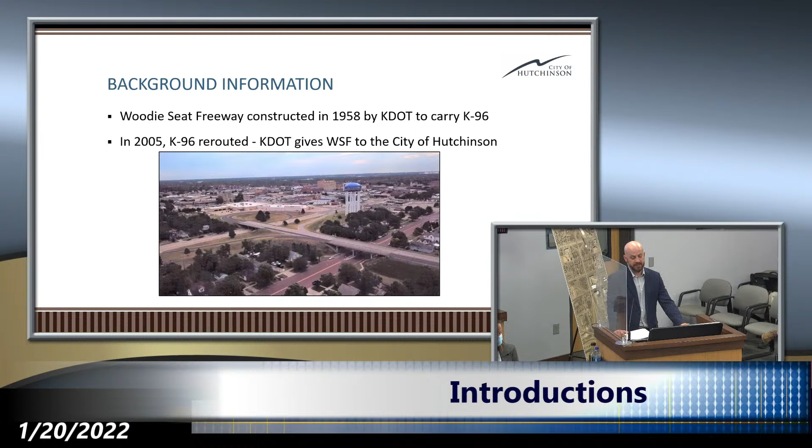So TEAP stands for the Traffic Engineering Assistance Program. It is federally funded and administered by KDOT. The intent is to perform traffic analysis and services for local agencies to analyze transportation challenges. These analyses are performed by traffic engineering consultants selected by KDOT. They are typically safety-related requests; failing infrastructure is not a reason for a TEAP study, nor is replacement in kind.

In 2017, the TEAP study was granted to the city and initiated. The consultants discovered that the intersection does meet the criteria of a dangerous intersection, but there was no financially responsible way of increasing safety with the current configuration. In 2018, the city requested a second TEAP study to help identify ways to mitigate the dangerous intersection. KDOT suggested studying an at-grade roundabout.

So in the photos here, the left one is a picture that shows 39 accidents that happened between 2013 and 2017 when the study initially began. And the right slide is a picture of a semi descending the off-ramp with a bicyclist at the bottom. With the way the descending drivers have to look over their shoulder, it isn't possible for them to see things in front of them. The grade is steep, which means you approach the intersection fast. The semi driver in this photo actually did not see the bicyclist and went through the yield sign. Luckily, you can see the bicyclist stopped at the last moment and let the semi go in front of it.

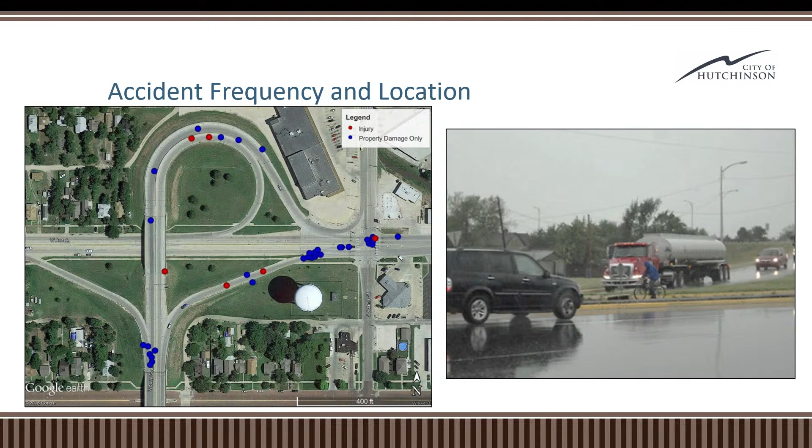So, the 2018 TEAP study evaluated several different options, comparing them to the existing interchange. These are the options that we'll be going over today. Options 1 through 4 were used comparing the current, then 2018, and future 2040 traffic volumes. Options 1 through 3 all involved removing the Avenue A and Avenue B bridges. Option 4 is the only one that keeps the bridges in their configuration, although all the upgrades are going to be required. The 5th option was not studied in the TEAP, and it is to end the Woodie Seat Freeway at Avenue F. This option was not studied due to its broad scope, and it affects more than one intersection.

So with that, we're going to go over the options. Here's Jessica. So we have 5 options to go over tonight. If you have any questions as I'm going through each option, feel free to stop me and ask a clarification, but we'll try and do most of the questions at the end when we get into our discussion.

So for the first 3 options that I'm going to go over, they're very similar, and they all require the removal of Avenues A and B bridges in order to end the Woodie Seat Freeway at the same elevation that Avenue A currently is right now. Shown here is the profile of the existing grade slope. It's kind of hard to see on the screen, but you can see Avenue B, Avenue A, and Avenue C, and the bridges that go over them. And then the proposed grade for options 1 through 3, which is a 4% slope right after Avenue C, coming down to meet where Avenue A is.

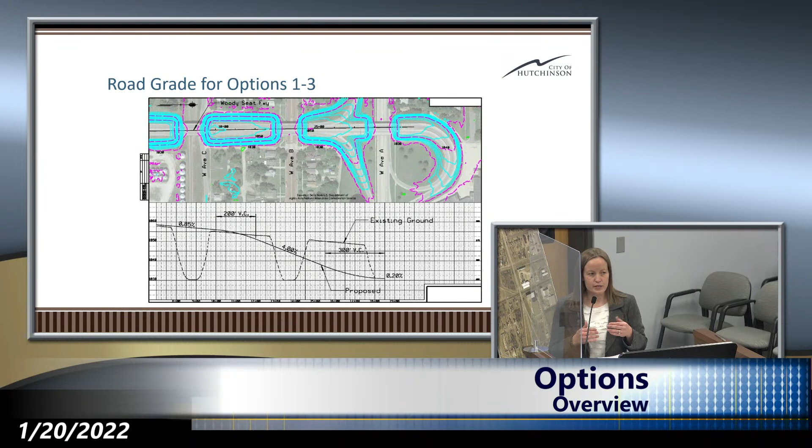Just for some scale, currently the off-ramp from Woodie Seat to Avenue A is 5.5%, and the on-ramp going southbound from Avenue A is 6%. And then the on and off loops that you drive on the north side of Avenue A, those are at about 3.8%. So the new grade would be very similar to what the grade of those loops are.

So we'll start with option 1. This is a single lane approach from Woodie Seat to Avenue A, ending in a T intersection. The northbound Woodie Seat traffic would be stop controlled at first with a stop sign, and then the stop sign would eventually be converted to a stop light if and when warrants are met. New sidewalks would carry pedestrians from Avenue B either north to Avenue A or south to Avenue C to maintain pedestrian access. Included with this option are pavement improvements from Avenue F to C and bridge repairs to the Avenue C bridge. And actually, these are included in all of options 1 through 3. If an option 1 through 3 is chosen, we'll be doing the road improvements from F to C. Okay.

So we'll go through some pros and cons of this option. I do want to comment at the beginning, and I won't say it for all 5 options, but it's important to look qualitatively rather than quantitatively at some of these. You may see one of the options has 1 con, and you think, oh, well, it only has 1 con, but it's a big one. So just try and keep that in mind as we go through this.

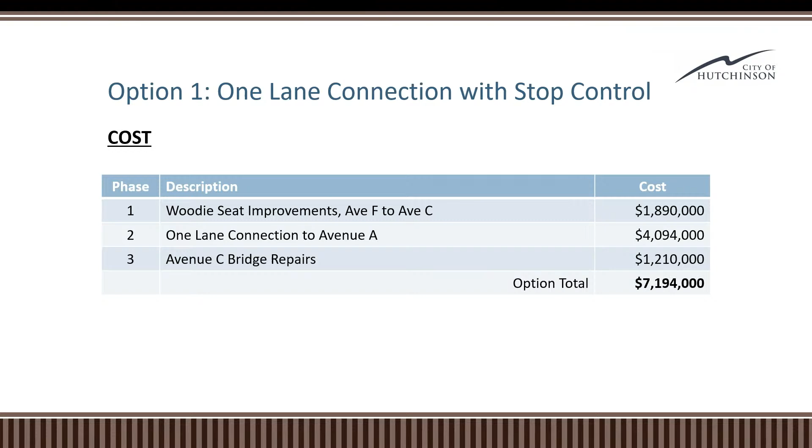Moving on to the next option, it looks a lot like option 1, except this is a 2-lane connection with stop control — two lanes coming off of Woodie Seat, two lanes going onto Woodie Seat. Again, this option removes the Avenue A and B bridges, and at first it would be stop controlled until signal warrants are met, and then a signal would be installed.

The pros and cons of this option are that, again, two bridges would be removed, so we would not have those on our maintenance roll. There would be fewer accidents than existing — 4.44 fewer, so a little bit, not quite the benefit that option 1 has as far as fewer accidents. That's reflected in the 20-year societal savings, about $1.28 million. But we would have the 4 acres of land available for park or green space.

The cons of this option are that the northbound left turn lane will experience a very long delay and long queue length. For future traffic volumes, this delay is estimated at about 11 minutes.

We're kind of joking in the office that there wouldn't be an 11-minute delay, because no one would be using Woodie Seat at that point. Everyone would be going somewhere else. You'd have a 10-minute or 5-minute delay somewhere else.

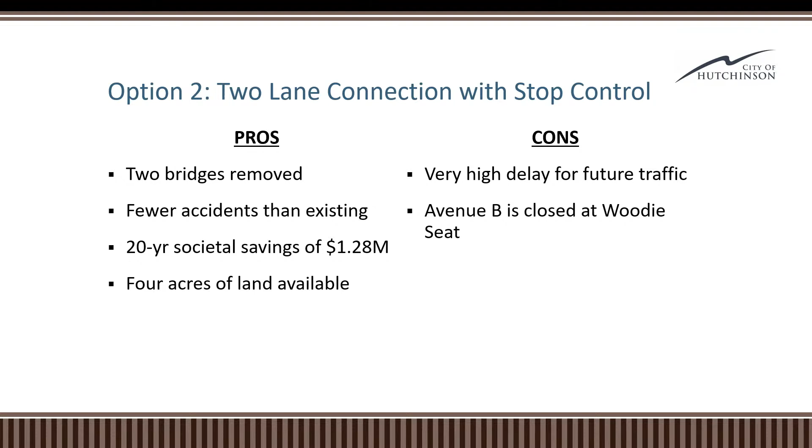And again, as with option 1, Avenue B would be closed. So we'll go into the cost of this.

Phase 1 is $1.9 million in roadway improvements from Avenue F to Avenue C. We have that 2-lane connection to Avenue A for approximately $4.2 million. And then the Avenue C bridge repairs would be $1.21 million.

A little bit later in the conversation, we will talk about how we can phase some of this cost. This cost isn't all due tomorrow; we can spread it out a little bit. And of course, Angela's here to answer all those questions for you as well. I promised her I'd throw her under the bus at least once.

Hey Jessica, quick question about the Avenue C bridge — if we repair it, how many more years are we going to get out of that? So what we're looking at is like a 20-year life, 20 more years before we need to do anything else with it.

It doesn't mean that in 20 years it has to be replaced. It kind of depends on how the structure ages, but typically when we're looking at bridge repairs, it's to get 20 more years. If we were to put a new bridge in, we're looking at a 75 to 80-year structure.

Do we repair it again in 20 years? Typically, yes, it's about every 20 years that you're looking at repairs. It's going to hold up if it's repaired properly down the road — that is the goal of the repairs, to get 20 years.

Jessica, quick question — when you talk about traffic lights, I'm a traffic tech. Where are you putting the traffic lights here on your T intersection? Are you going to put one right across from the T? I believe so, but I don't know that it's fully been designed — it's just conceptual at this point. It's going to be semi-actuated, so you'll only get calls coming off that leg. It hasn't been designed yet, so I couldn't answer that fully.

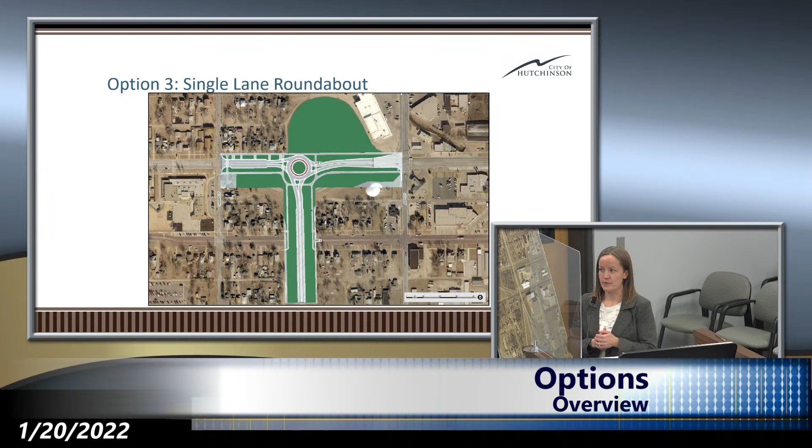We talked to the consultant that studied this, and they said yes, the second roundabout is really needed for future traffic, but we could make one roundabout at the interchange work with current traffic volumes and some signal optimization — the second one may never be needed. So we pared this option down to make it a little more realistic for our financial situation.

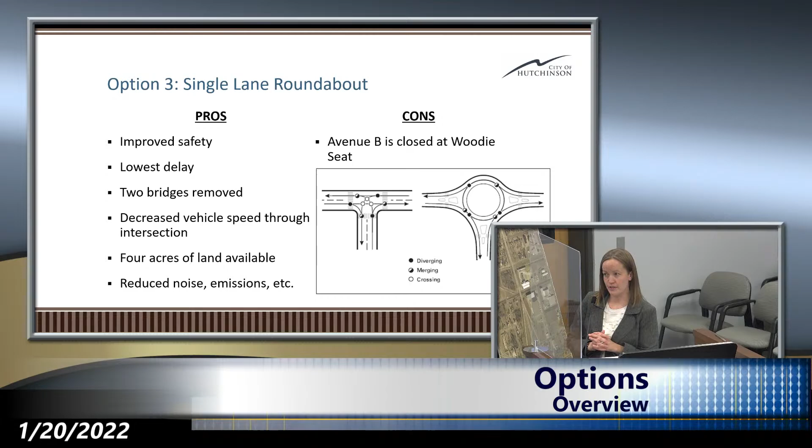Okay, so we'll talk about pros and cons of this — it's going to get a little wordy, so stick with me. Roundabouts are a proven safety measure that reduce the number of crashes, fatal crashes specifically, at intersections. Compared to a stop-controlled T intersection like options 1 and 2, a single-lane roundabout has 6 conflict points, where a stop-controlled T has 9. You can see in the picture here the conflicts as you're turning left, turning right, or going straight.

One important thing to note: you don't see crossing conflict points in a roundabout, and crossing conflicts are notorious for more serious crashes. That doesn't mean you don't have crashes with a roundabout — it's that the types of crashes are less severe. That's why you see higher societal cost savings here compared to an intersection with different types of crashes, since diverging and merging conflicts are less severe.

And then, like I mentioned before, with this particular option, we have the option for a second roundabout in the future to improve or maintain traffic flow through the corridor.

I also want to mention that roundabouts are safer for pedestrians. Pedestrians enter and cross at a shorter distance, and they only cross one direction of traffic at a time. So if you're thinking about a traditional four-way intersection, pedestrians are crossing two directions of traffic, whereas at a roundabout, they're only crossing one leg of one-way traffic.

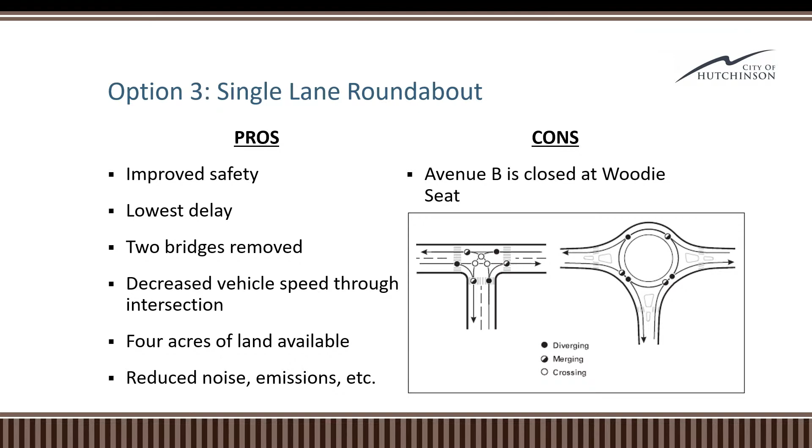So we'll talk about cost on this option. Again, with phase 1, the Woodie Seat improvements from Avenue F to Avenue C is $1.9 million. The roundabout itself comes in at about $4.13 million. And then there are those Avenue C bridge repairs for $1.2 million.

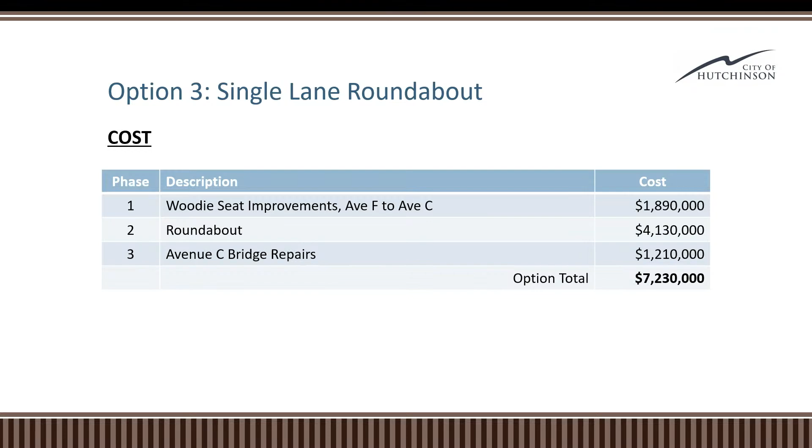Jessica, I may have missed it—did you say what the actual traffic delay would be, time-wise? You know, I don't think I said that. I have it here in the study. Can I get back with you on that? Just curious. Okay, it's lower, but how significant? We can move forward and that can be found.

So the existing condition in current traffic has a delay of 29.5 seconds, and with a single-lane roundabout it would be 6.4 seconds. With existing conditions, future traffic delay is 45.5 seconds, and with a roundabout, the future delay would be 9 seconds.

I do also want to point out, because we applied for that grant with this particular option, a cost-benefit analysis was required. So we did that for this option, and the cost-benefit ratio was 1.87. Typically, anything over 1 is considered a go, so this was a go.

Okay, option 4 is what we're calling the no-build option, what the TEEP study called the no-build option. We're kind of plagiarizing from them a little bit. No-build does not mean do nothing—rather, that infrastructure remains in its current configuration.

I do want to note that Avenues A, B, and C bridges are over 60 years old. Their design life when they were built was 50 years. I mentioned that if we replace bridges now, we look for a 75-year design life—when they were built, that may not have been the case. I have lots to say about the design of these; they were kind of unique structures when installed, and Kdot doesn't design them like this anymore for a reason. So we'd be looking for configuration or structure upgrades with the bridges themselves, but the configuration of the roadway would stay the same.

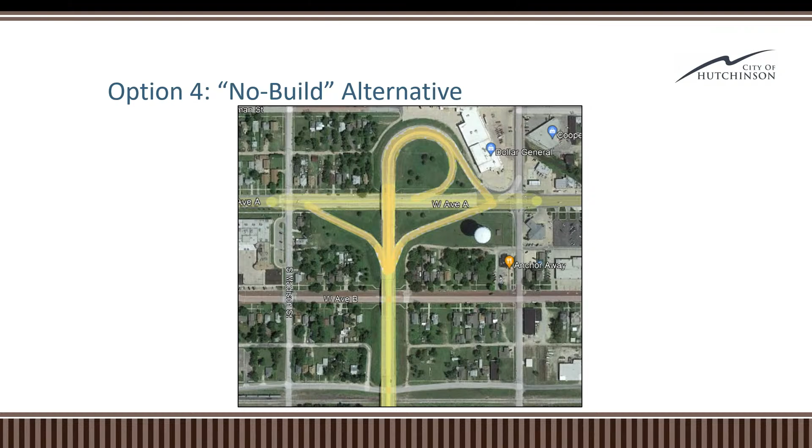So we'll go over some pros and cons of this option. The big pro is that Avenue B remains unchanged, which we know is a neighborhood concern. The cons are that there are no safety improvements and no improvements to pedestrian infrastructure. We also have those two additional bridges, Avenue B and Avenue A, to maintain in perpetuity. And it has a higher overall construction cost—to be clear, a higher construction cost right now and a higher overall maintenance cost in the future.

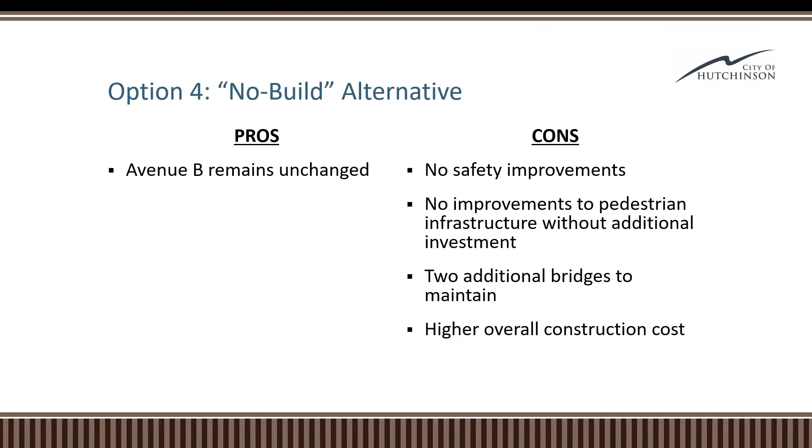So we'll talk about cost. The first phase of this would be to start repairing the pavement on Woodie Seat, from Avenue F all the way to Avenue A, for a price tag of over $3 million.

While that's happening, we would have a consultant working on the design to replace the Avenue B Bridge. The cost estimate for that bridge replacement right now is about $2.86 million. That's why I mentioned the Avenue C Bridge is quite a bit bigger and higher than that. Avenue B Bridge is actually not as large, so we have some savings there, I guess, one way to look at it.

We also have some Avenue A bridge repairs for about $770,000, and then Avenue C bridge again for $1.2 million, for a total of $8,060,000 on this option.

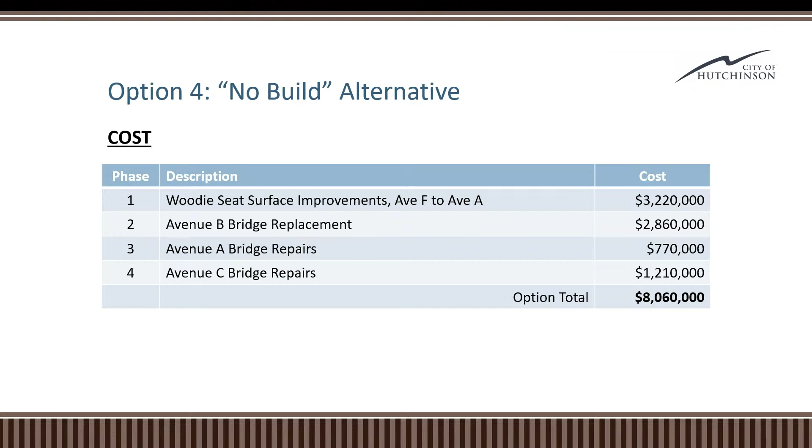Okay, so that concludes the options that were looked at in the TEEP study. While we were preparing for tonight, several versions of this last option were mentioned, so we put it together. I want to clarify, and I'll probably say it again, that this option has not been studied. So the costs we put in are estimates for what we know right now. The cost is probably a little low, considering that as we study it, we might find other things that need to happen, infrastructure upgrades that will increase it.

So this option is the removal of the Woodie Seat Freeway at Avenue F. We would remove all of the bridges. Traffic would end at Avenue F. Improvements to Avenue F, Monroe, and Adams would have to occur to handle the increased traffic that would now be diverted to at-grade streets. And we would likely need an improved connection to Main Street. We think that would happen at Avenue A, but again, that's not included in our cost—we haven't studied to make sure that's actually feasible yet.

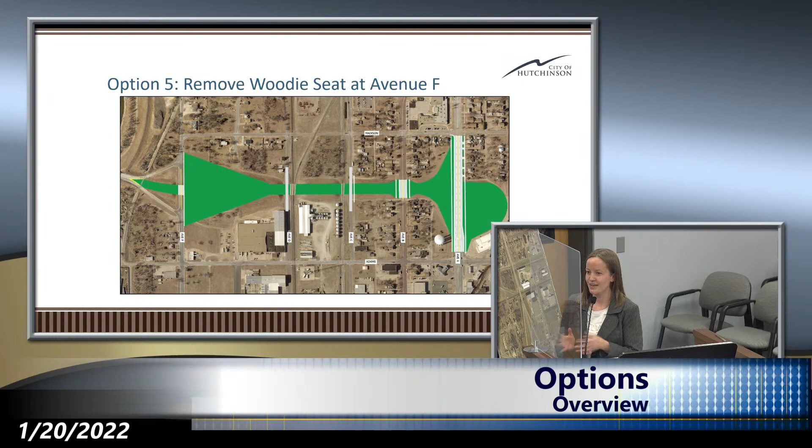So we'll go over some pros and cons of this option. The pros are that we would eliminate all future infrastructure maintenance costs of these bridges immediately. There would still be maintenance, but it would be at-grade infrastructure, roadways, things like that, and across the board that's cheaper than maintaining elevated infrastructure.

A major pro of this is that we don't have a closure of Avenue B. And then we would get improvements to Avenue F, Adams, and Monroe, so those roads would be a little nicer, I guess. And we have the option for a gateway entry to the city a little farther south on Main, increasing traffic to businesses farther south.

One of the cons to this option is that we would have the entry to the city farther south on Main. Why is that a con? Well, farther south—I believe it's Avenue C—south of Avenue C, the intersections on Main Street are just not built for that level of traffic. So we would need to do some improvements there, or we would see some fairly quick degradation of the streets when more people start driving there.

I want to compare what we're looking at right now. On Main Street, south of C, we're looking at about 2,500 vehicles a day, and Woodie Seat has over 10,000 vehicles. It's not to say all 10,000 are going to go to Main Street, but you would definitely see a substantial increase in traffic in that area, which could be good, but for the roads, we would need to make some upgrades.

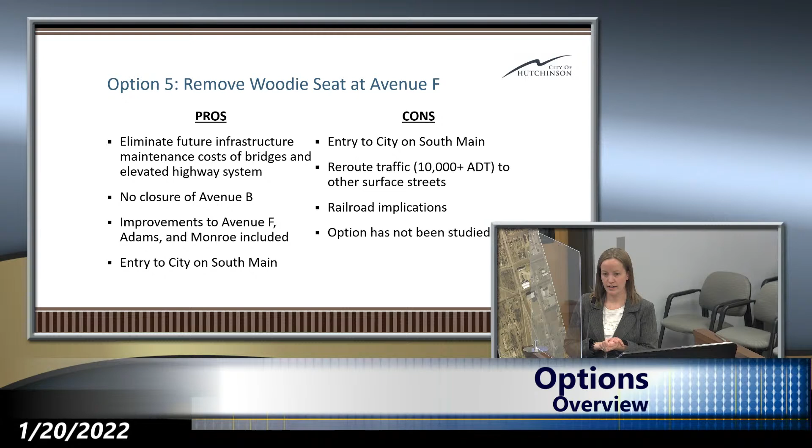And finally, like I said before, this option has not been studied. We did have an engineer briefly review to make sure we could get traffic from Avenue F down to grade, but that's as far as we've gone. So needing to study this option would take additional time, and after that study is completed, it might be that we find the option doesn't work.

Okay, so we'll talk about cost on this. Again, these are preliminary, just based on improvements we know we need. Improvements to Monroe would be about $410,000. Improvements to Adams at $1.4 million. Improvements to Avenue F at $1.1 million, and then removing Woodie Seat at a little over $4 million. It seems pretty expensive for tearing things down, but we were considering removing all of the soil—excavating and hauling it would be incredibly expensive, and it's a substantial amount.

That's the high number there, for a total of $7 million that we know of. Does this option not include any reconstruction or upgrades to the South Main streets? It does not. We didn't feel comfortable putting a number on that yet until we studied how the traffic flow would actually work. It seems like that would be substantial. It would be. Okay, thank you.

So the final thoughts on the discussed options. One thing I wanted to bring up was on the con of bringing the extra 10,000 vehicles into South Main—you're taking 10,000 off a 4-lane road, and there are 3 different 2-lane options. Even Main is 2-lane from C to A. That's a lot of vehicles to cram into 2 lanes, so that's where the study would reveal a little more before we can get into that.

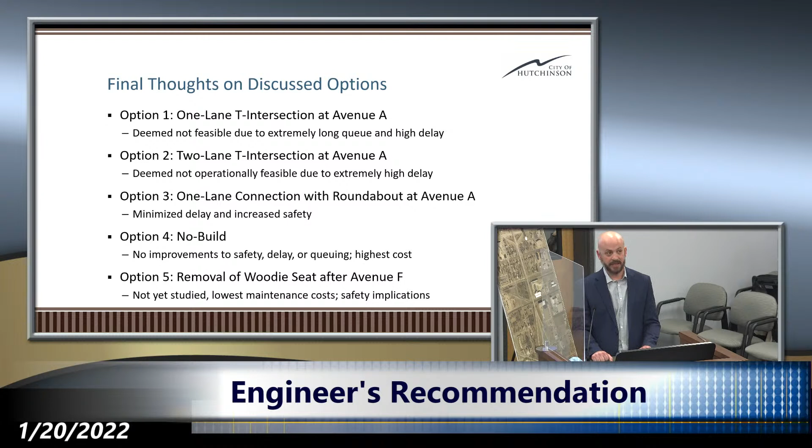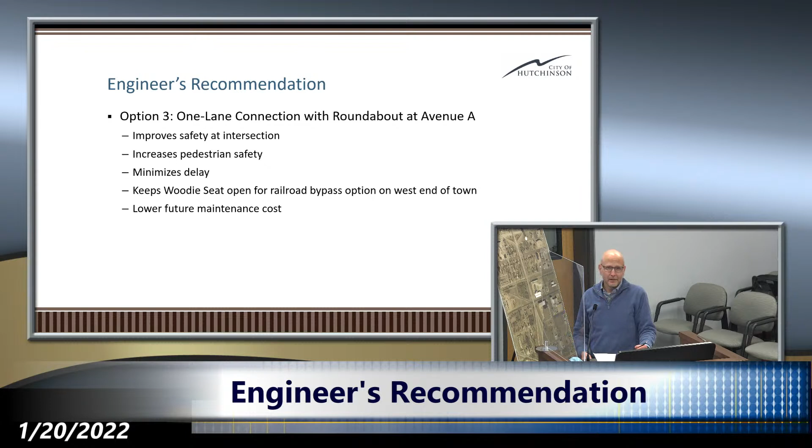So we would recommend Option 3, the 1-lane connection with the roundabout at Avenue A. It does improve safety at the intersection and can reduce the number of accidents going forward. It also minimizes traffic delays with existing and future traffic, and is one of reasonably lower costs for overall construction, while minimizing future maintenance costs due to not maintaining a couple of bridges that already need some maintenance.

This option also makes it easier to assimilate into our maintenance schedules, to do some of the maintenance—at least the pavement portion—without breaking it out as a separate project that has to be bonded, aside from the bridge maintenance going forward. Keeping the railroad link open, where you can bypass the railroad and cross over the top, is important going forward. It connects the north and south parts of Main Street, and the residents north to south as well. So I think that's the best way to proceed at this time.

So Jessica has a couple more things to talk about. Okay, so we're going to talk about schedules. I'll try to make this really brief—I'm sure you guys will have additional questions as you discuss some of the options. It's kind of hard to see up here, I apologize, but you do have a schedule in your handouts that you can look at more closely.

This schedule is based on engineering having some kind of direction from you by the 1st of February. I want to comment that maybe a month slip in that might not seem like a big deal, but if we miss March or April, we start to miss funding opportunities that KDOT has. And if we miss those opportunities, it's a fiscal year wait. It's not a few months.

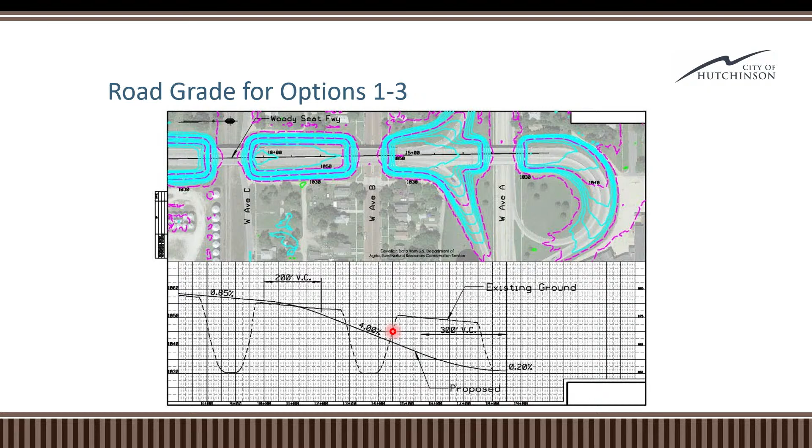Can you walk us through how pedestrian traffic, or any kind of traffic, would be rerouted when B is closed? How would we help alleviate that huge inconvenience for the neighborhood?

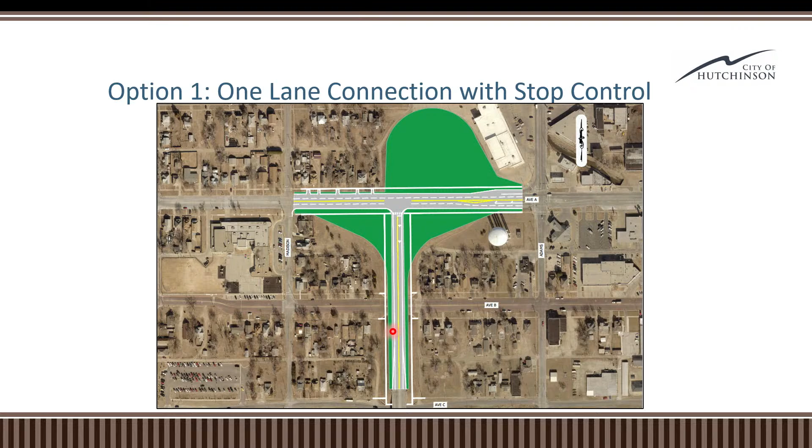I guess I can speak to pedestrian. Are you talking about during construction or just once it's closed? Just once it's closed, because it's a permanent closure, right? Okay, yeah. So they would have an option. They could either go north to Avenue A to get to the east. If they're going west, obviously the closure there is not the issue. But to go east, they could go north to Avenue A and through, or they could go south to Avenue C. It's about a 0.2 mile detour to choose either of those options.

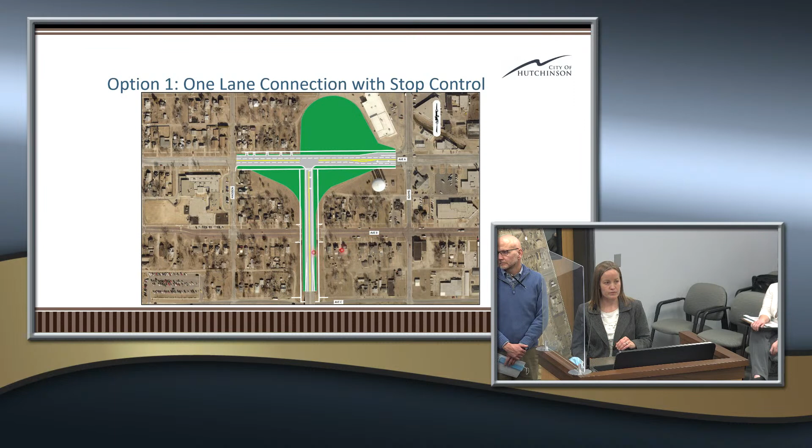That's for vehicular traffic. If you're a pedestrian, you can sort of see in this, these little white lines right here are new sidewalks. Okay. I know one of the comments, at least at the last community meeting that we had, was safety for pedestrians going up to A because there's more traffic up there. They might not want to send their children up there. Understand that. And so we have added the sidewalks going down to C. It's the same distance and a different option, obviously a lot less traffic that direction.

And then we have the option to repair C Street going east. That's a good question. It's definitely something we want to look into. I will say that road is very close to railroad right of way. Yeah. And so we might be very limited what we can do there. We might be able to do surface improvements. We might not be able to do alignment improvements. It's something that we need to look at and certainly will if that's what we're directed to do. Okay. Thank you.

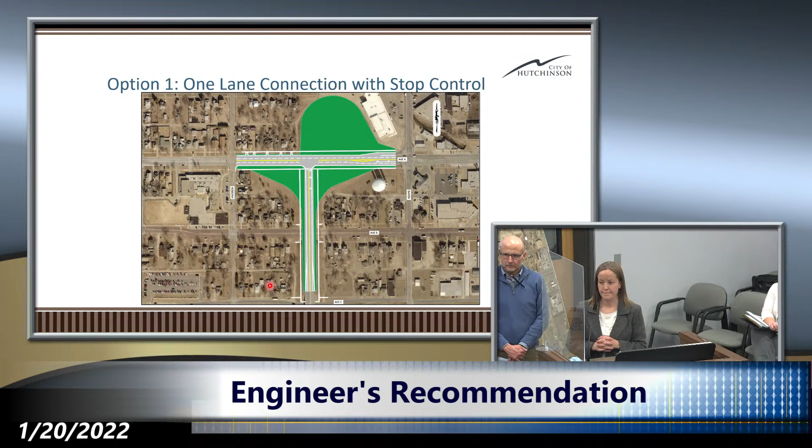Jessica, what's the grade going to be on B Street? How much dirt will still be there? Go back to this. You can see for reference, it would be about 11 feet lower than what it is right now. And what is it now? I don't have that graphic, honestly. I cannot see that. About 23 feet. So it'll be about 10. Yeah. Okay.

I'm just curious. I'm just thinking of possibly a way for pedestrians to still use B Street and not close it for pedestrian use. I'm just seeing if there's enough room to do something. I don't know the cost implications, or if that's even possible. I wasn't here when the pedestrian bridge was put on 30th, but I've heard that that cost over $1 million, and that's to cross traffic at grade. The Woodie Seat traffic would be approximately 12 to 15 feet higher than Avenue B. So that pedestrian bridge to get over it would be quite giant.

Is there an option to go under it? Yeah, that's what I was thinking. That's why I asked how much dirt. Yes, you can build a tunnel. Do you want the cost of that? We haven't studied the cost or put an estimate to that, what it would take to do that. Would it be much different than a large box culvert, basically, in design? It would be a very expensive box culvert, yeah. I know Sarah had brought that up at a previous meeting, and it was pinged back and forth a little bit. There were some concerns about safety and maintenance of that. It's not a bridge, but it's a tunnel now, so we would still need to maintain that. So there would be some costs associated with that as well.

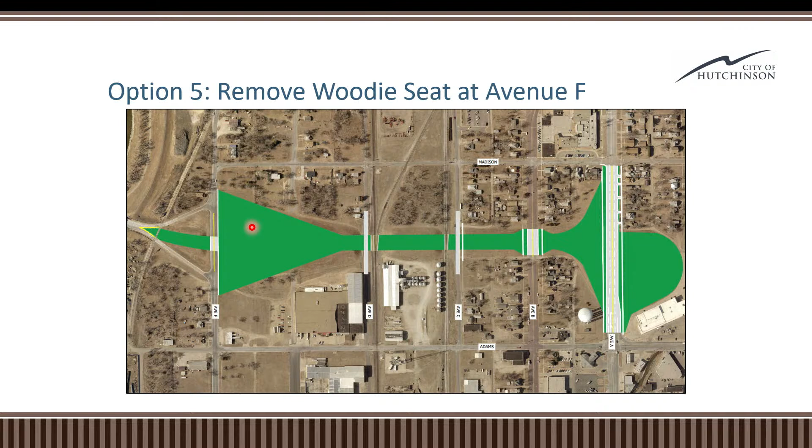Because it used to be, long before I was around, this was 96 highway, and at one point commercial traffic exited on F to get to South Main and get to all the businesses on South Main. I don't see a reason why we shouldn't try to route traffic that way again.

And people also have it as a habit that it used to be 96 highway. I still take this route into town versus other routes. I think there's a lot of people that live in town that would easily go Airport Road if they're traveling from Wichita, if it was 1 minute more inconvenient here, depending on different areas of town if their destination's not local to this spot.

I'm thinking. Yeah, and then you'll also lose the access for South Hutch people coming into town to go to work, which is a large part of South Hutch. And the South Main Bridge isn't a bad bridge as far as I'm concerned, but you have all the train delays and everything else.

And the people that leave -- I know back when I lived on the west side, on Adams up north, it was significantly quicker for me to cut down this way if I was going to Wichita than to drive all the way through town. I mean, again, it's a habit thing. Right, so I understand what you're saying, but are there any other capital improvement projects that are either on our wish list or our plan in the next year or two that require a large amount of dirt?

If it's a significant cost to get rid of it, then do we have other projects that need it? We have places where you can get rid of it -- if we ever do the Cow Creek project, as we get closer to construction for Cow Creek, that's also getting rid of dirt.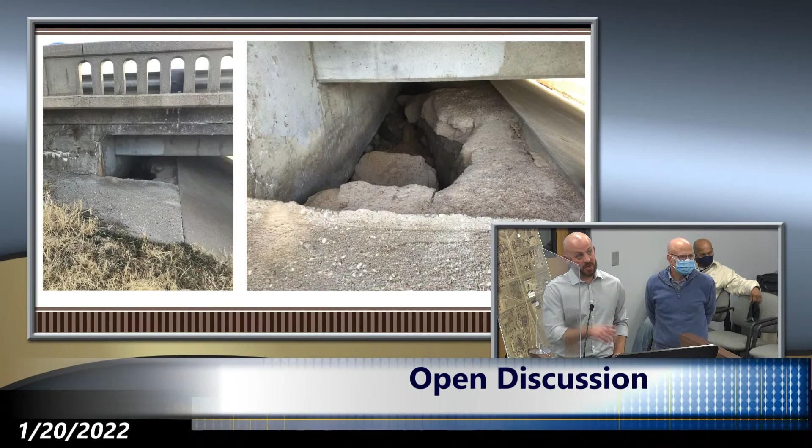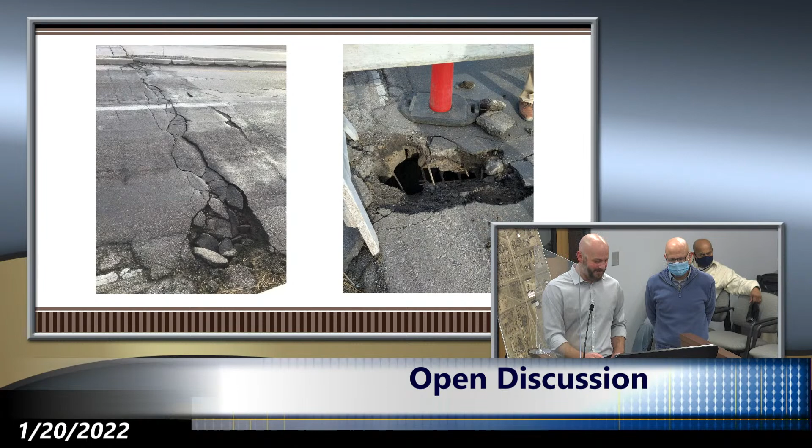We do actually have some slides from when I went up and evaluated it. So here's the abutment. When I walked up the riprap or the slope there, you can see that it was washed out underneath the abutment. You can see that it goes back under, and then from there it came up to this hole that fell 7 feet - it was a 7-foot deep hole. It wasn't tiny. The problem is, let's see if I got the laser pointer here.

Yeah, this right here is actually the concrete. When they hit it with the hammer, it just fell into dust.

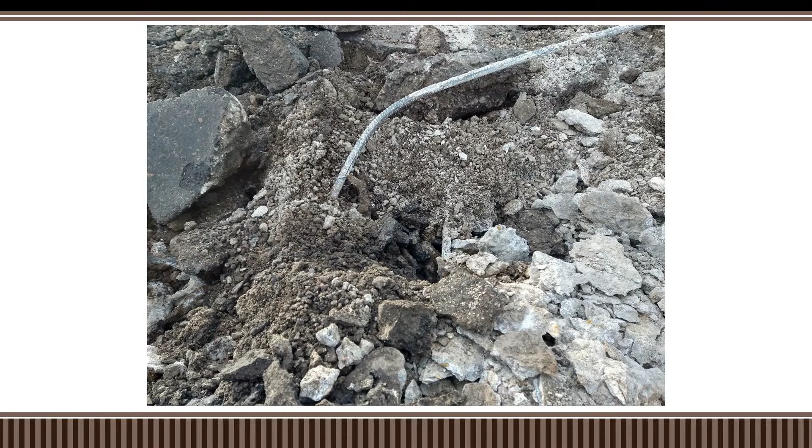So when we flowable fill this area, because we have to excavate it all out and flowable fill it, our consultant came in and evaluated it. We did bring in a structural engineer, and he said it's a good couple-year fix. To do an appropriate fix, we're looking at a couple hundred thousand dollars on a bridge that's due for repair or replacement within 2 years, just for this one problem. And that's showing 2 locations that had that concrete in that condition.

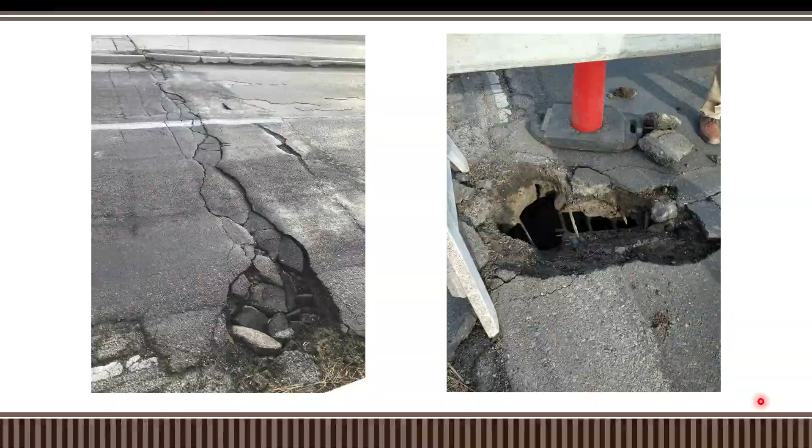Oh my goodness. I don't know, I can't speak with any certainty that it isn't scattered in other locations near any other bridges, that this won't happen several other times. We know we have the concerns on the Avenue B bridge.

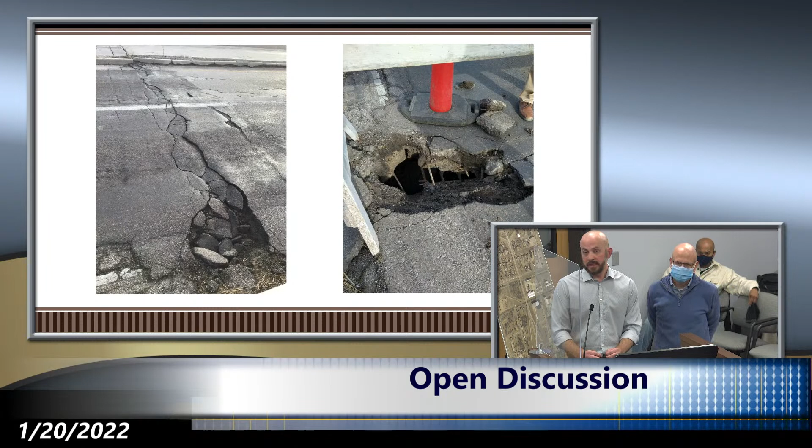You had brought up the study, like if we started looking at a feasibility study on potentially doing the removal, option number 5. One downside is the study's going to take time. We have to get in, send out RFQs, pick a consultant, and that'll take at least a year if you're looking at a timeframe, and that's just for the initial feasibility study.

There could be more studies beyond that, including railroad meetings or design-build cost studies to determine things. Maybe it ends up being a $15-20 million project and we can't even begin to do this, so even though we just spent $300,000 on the study, we have to reassess. So there are pros and cons. It's a very moving piece, but the study's going to take a year.

If this bridge, like I said, we're putting a 2.5 year fix on it. Again, it doesn't mean we can't do that, it just means we're pushing this bridge really close to that timeline of not being in a good place to do something else. I just want to be sure we're forward thinking on this, and there are some benefits to option 5, in my opinion, for that neighborhood specifically.

It sounds to me like option 5 is going to be dictated by the railroad and possibly emergency response times too. Exactly, we haven't even really talked about that, and I haven't talked to Chief Beer about that. Right, because you have Chief Beer and then Chief Hooper and then the EMS response times. I don't know what that would do for the hospital accessing the west side of town.

I don't know all of those, that would all be studied. Right, that would all be part of the study. Well, I would think there's no point even moving forward with the study if it's a really hard no from multiple rail companies too. Correct, we're going to be fighting an uphill battle just to learn we can't even do it. But you're not going to know until you ask.